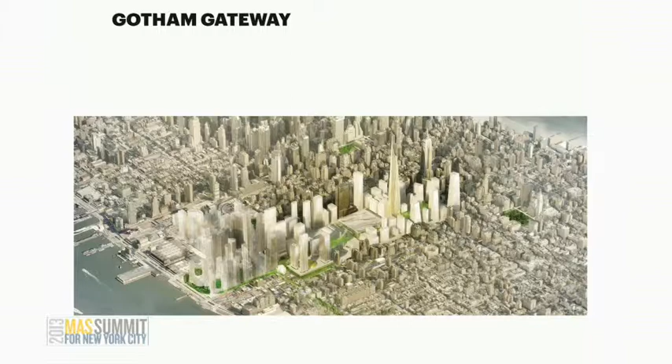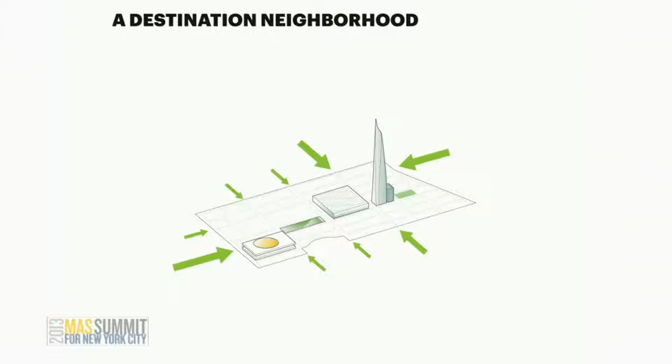I'm just going to dive into Penn Station. Our proposal from SHoP Architects was to talk not just about the station, but the whole neighborhood, and what this neighborhood could become by talking about it as Gotham Gateway, as a new place, not that everyone arrives and then tries to run away from, which is the condition we have around Penn Station today, but a place that's really a destination, a natural place not just to catch a train, but to do the things that we love in New York City.

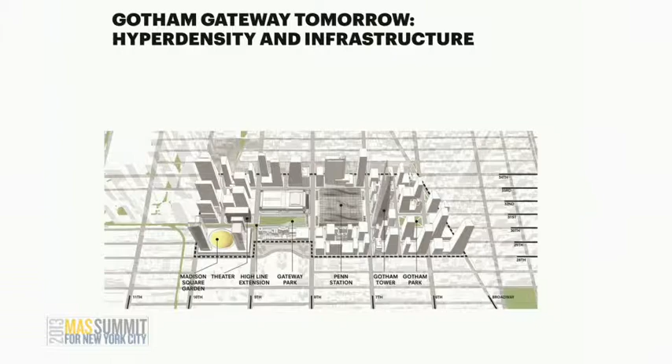If you look at Penn Station today, it's unsafe and unwelcoming. This is more than just about the architecture of Penn Station. It's about the fact that the whole neighborhood is cruddy and unsafe. We believe that if you make the right public investments in Penn Station, that investment will more than pay for itself because of the enormous value creation, essentially doubling down on the model we have at Grand Central Station today, because of the great idea of coming into a train station into a new neighborhood with a new public space network that links over to Hudson Yards and the High Line.

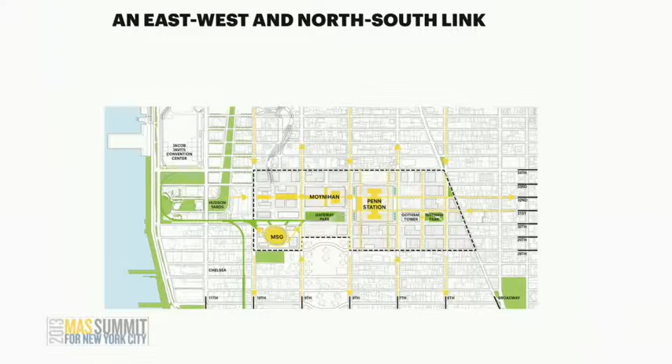One of the key things we talked about is Madison Square Garden moving to the Morgan Postal Facility site. This can happen. It's an assembled, federally owned piece of land. We think it's critical to invite the garden to move there. The garden can realize all of their air rights as well as a brand new facility there that more than meets their needs and opens up Penn Station.

We thought of this as kind of an urban bowl. For those who know the High Line, there was this whole air rights transfer done around the High Line in order to make it happen. Similarly, you could have a low area that is the station and parks and so forth, with a ring of new density around it—an infrastructure we call an infrastructure of opportunity, in terms of a new garden, a new park, a new Penn Station, and new development.

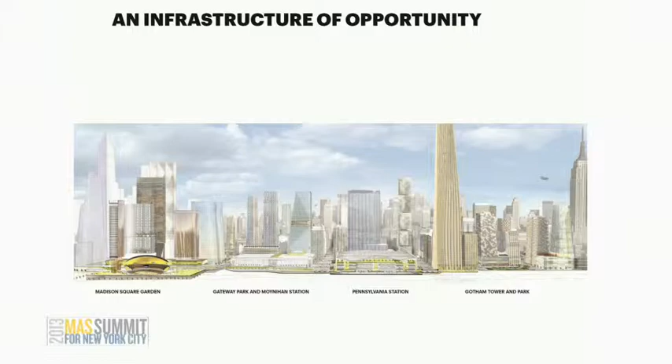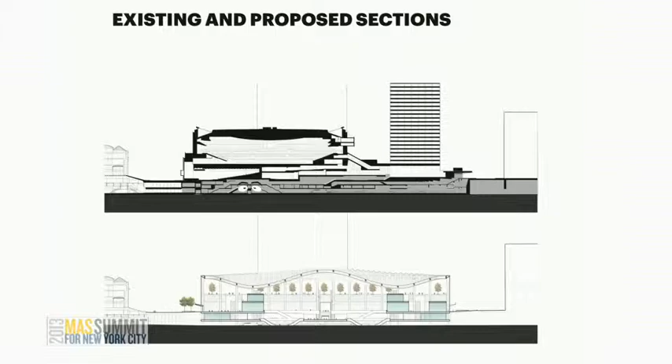On the top, you see Penn Station today, a place where you can't figure out where anything is when you arrive, as opposed to this very open green section with air passing through it, light passing through it.

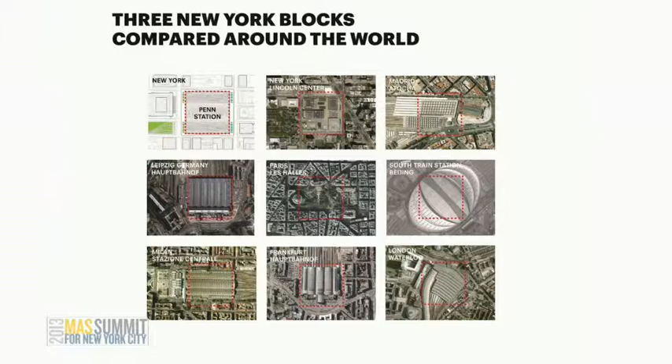We decided to actually take over the block just to the south where Amtrak is planning new tracks and platforms, and looked at that square, that 3-block square. That 3-block square is actually the same size as Lincoln Center, but it's also smaller than most of the major train stations being built today, including the one in Beijing, including Waterloo and so forth. It is not at all extreme to say we need those 3 blocks for a world-class train station in one of the most important cities in the world.

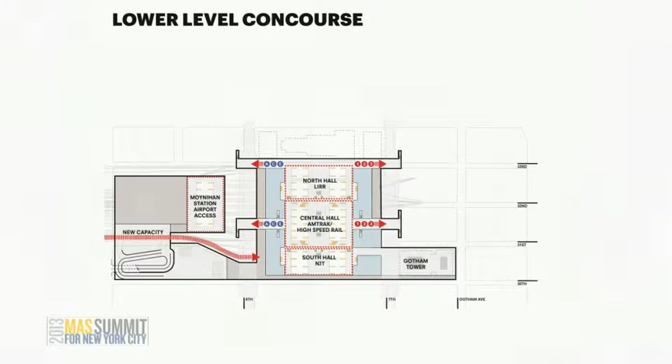We decided that we should look at that in terms of having halls where you actually know where your train is—a Long Island Railroad train, an Amtrak train, a New Jersey Transit train. It's a crazy idea, I know, that you might know where you're going in Penn Station.

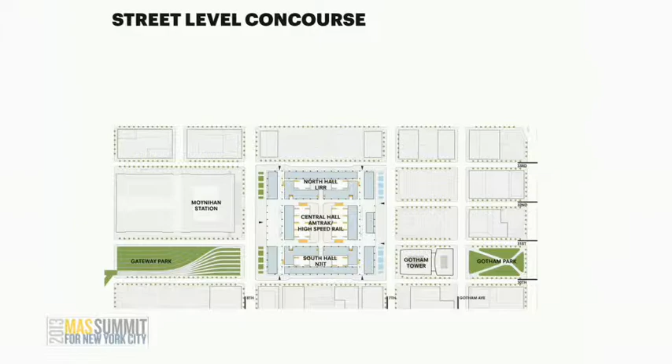We also took the security concern very seriously. We're taking security so seriously at the Trade Center site. Penn Station, I think, has to be looked at with that same firm eye, with an understanding that we shouldn't be driving trucks around Penn Station, and we should have proper standoff distances, which means great public sidewalks and plazas, like in front of the Metropolitan Museum of Art, so that you have a real graciousness to how you arrive in the station. And then when you get to the station, something that is uplifting, something that actually allows you to look down and see the trains, see natural light, as McKim, Mead, and White once had in the original Penn Station, and something that really lets you understand where it is you're going.

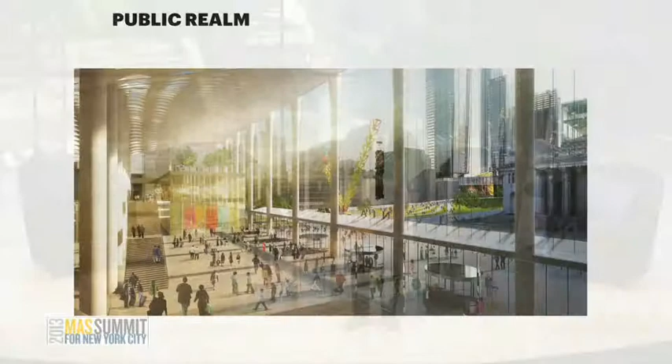And that's true not just for Amtrak, but for the commuter rail, both Long Island Railroad and New Jersey Transit. In terms of the sequence of spaces moving out, this is looking at 8th Avenue, back at the Farley Building, and what you can see in the image is not just that new portico from Penn Station and the Farley Building and a new park coming from the High Line, but Madison Square Garden.

And what's interesting is we're the designers of the Barclays Center in Brooklyn. This is about the same distance from the train station out to the Barclays Center. It's wonderful to be able to come out of the train station and understand where the arena is, instead of wearing it as a hat.

And so this is looking back in the other direction. This is the park that comes down from the High Line, and you see the Farley Building and the train station, Jeff Koons sculpture. This is the garden itself sitting on that Morgan Postal Facility site. That site's incredibly important—it is the knuckle between Hudson Yards and Chelsea and so forth.

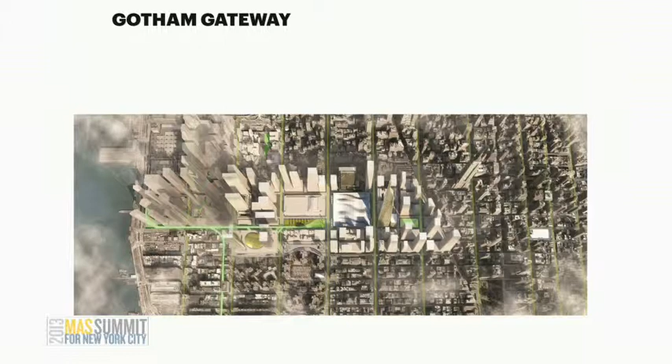And so this is looking at it from the High Line, and then in terms of looking at it in terms of the connections to the overall neighborhood. I was involved with some of the planning for Hudson Yards. We always talked about Hudson Yards as Midtown West, right? It was Midtown moving west. Turns out it wasn't Midtown moving west, it was Chelsea moving north.

It was all of the activity of the High Line, all of that wonderful residential that's going to be so important for Related, and it's connecting to Chelsea that I think is so critical in terms of making Penn Station work and turning it into a glorious neighborhood.

We also looked at this in terms of not just the pretty pictures, but how do you implement it? We called for a gateway task force led by Vice President Biden with the governor and the mayor, through a series of steps of securing the garden's relocation, out to building the new train station, and then creating a transfer of development rights district that would help pay for all of this. And we think that you can largely fund it.

I just want to close, because I have a minute left, to just talk about the fact that that's the hub of our city, and that's one way to be thinking about our city, and that's very important. But at some level, it's an anachronism in the sense that our train stations are very important, but we now have a different kind of city.

We are now working all over our city. We're building office space all over our city. There are people who live and work in Brooklyn and come to Midtown Manhattan once every 6 months, unheard of 10 years ago. And so just to give you a glimpse at some of the things we're doing...

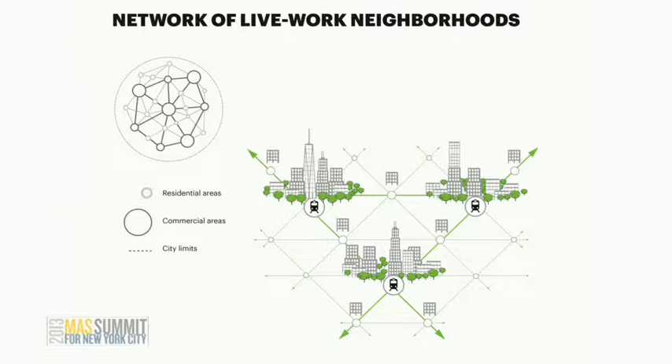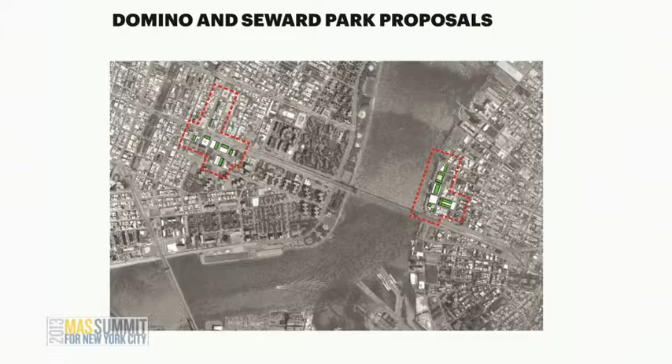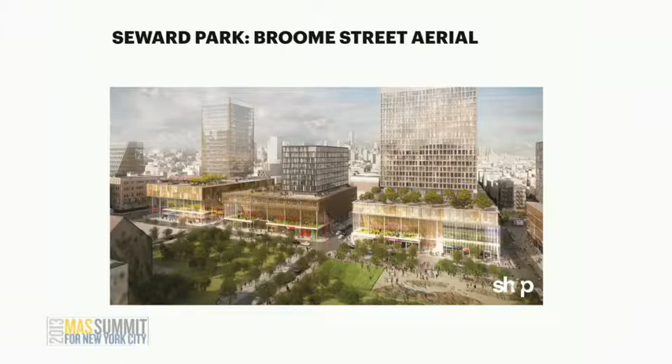It's extraordinary what's happening in the city in terms of this. And so this is our Seward Park proposal that shows a lot of light and air and greenery, and again, that new office space. And then 50, 30, 20 affordable housing. This is going to house a lot of low-income New Yorkers. We think it's going to be very, very important in terms of the future of the city.

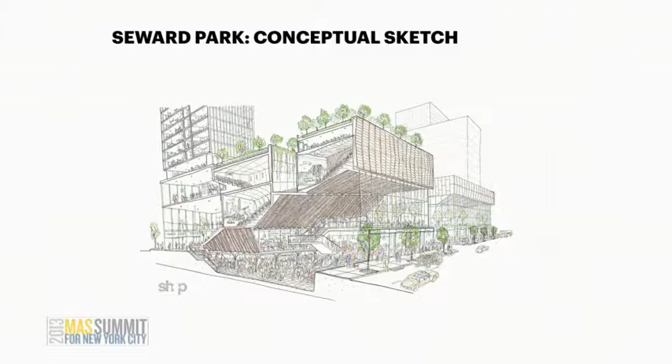I'm not going to go into detail, so I'm just not going to talk to these slides. I'm just going to give you a glimpse of what this will look like. We're master planning this right now. There'll be many architects involved. This is an underground market space that's being developed with a big light scoop.

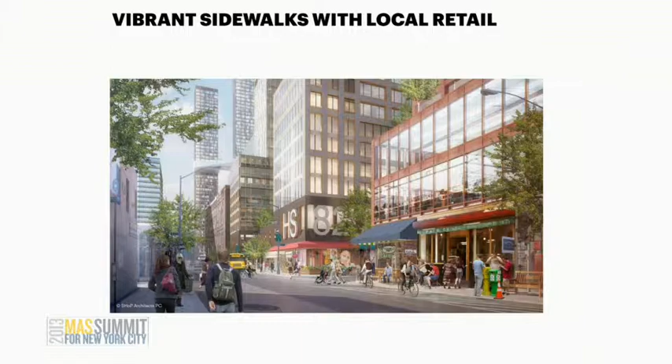And then quickly—oh, and that's the new Warhol Museum. Quickly, across the Williamsburg Bridge at Domino, where there's a great streetscape that will be developed, a great park space developed by Field Operations, who's also the designer of the High Line.

I'm sorry, couldn't hear you. The Domino Sugar Factory will actually be new office space. There'll be more people working on this site after this is completed than worked at Domino Sugar in 1960, by a factor of 2, which I think is extraordinary.

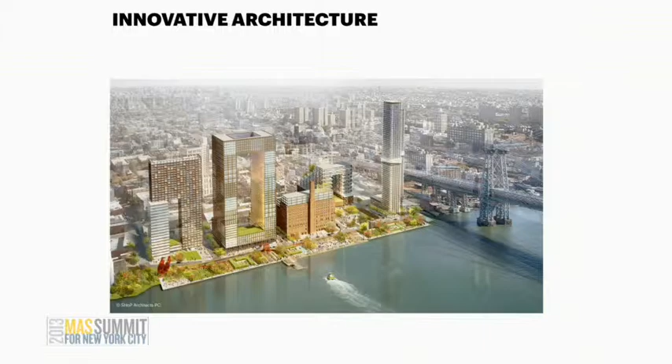People will bicycle and walk to work there. The Walentases, our clients, have invited some very interesting, exuberant kind of architecture to be a part of this, to bring light and air back to the neighborhood. We've been very excited about developing it with them, and this is about to go through public approvals.

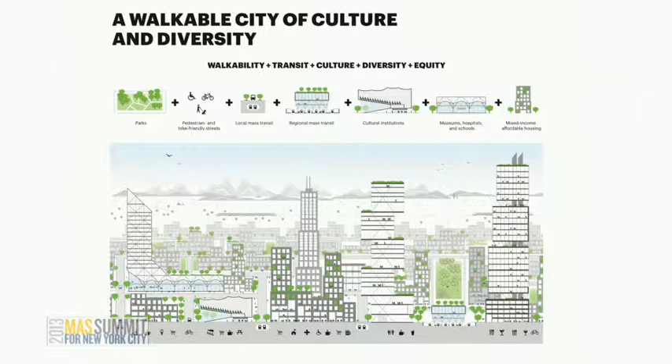And I'll just close with: this is the city that we could be. Not just with Penn Station, but with this wonderful new network of neighborhoods where people live, work, and play in a fundamentally different, more decentralized way, but with this very important hub train station that we have to rebuild.

Now is the time to work on Penn Station. I think our political class is there. I thank the Municipal Art Society and Vin and Jeannie for their leadership on it. Thank you very much.